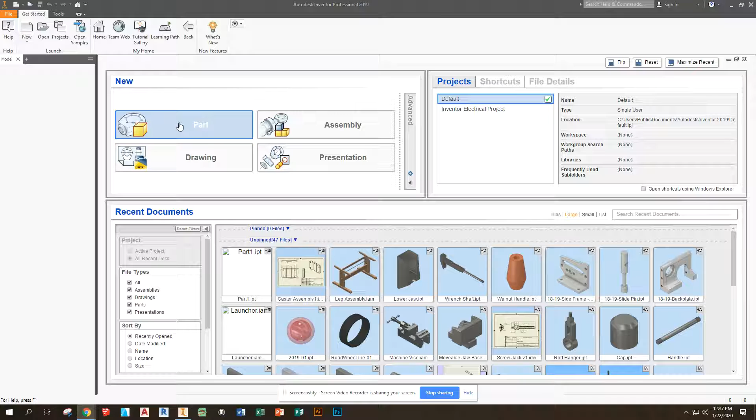So, but as we're doing this, it's really pretty easy. We can actually do the holes in it two different ways, but we're going to do them all about the same. Oh, it looks like we got something disconnected. We'll worry about that in a minute. But let's do the first part right now.

So first part I'm going to start a sketch. I'm just going to go to my XY plane. I'm going to pan down by pushing my mouse wheel down, holding it and dragging it downward until I move that to the lower left-hand corner of my screen. And I'm simply going to start here.

And since there's no dimensions applied to this, I'm just going to draw a line that's, say, 4 inches long this way. Zoom out a little bit, point it straight upward, get it going 90 degrees, type in 2 for the distance. I'm going to bring it over about 3/4 of an inch, down about 1 inch.

I'm actually going to use the dimension tool here in a minute so I can explain it. We're just going to throw in a couple of things real quick. Use the constraints that are showing up, the visual constraints like we are, and get that shape just roughed in. So there's my rough shape of my first part.

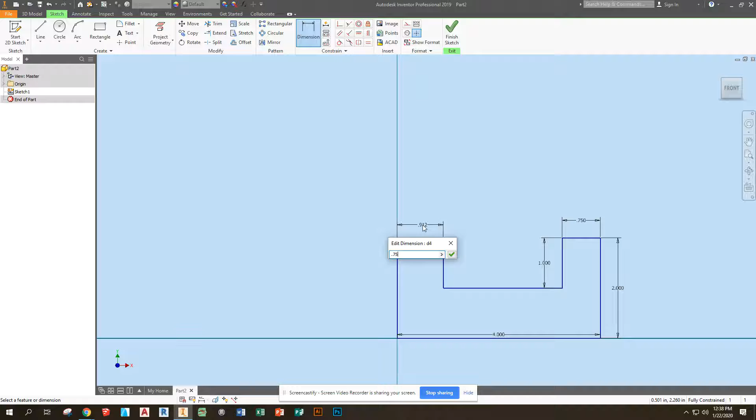Now, I didn't put a couple of dimensions on it. This dimension right here, so I just use the dimension tool, click on the line, drag it up where I want to place it, click again, type in 0.75, and that should right there be constrained to be the same as that because this is parallel and that is parallel. And I think I constrained it visually to that one, but let's find out. It should tell me it's constrained. Yep, it is. It is constrained because of this issue right here, and we're good to go.

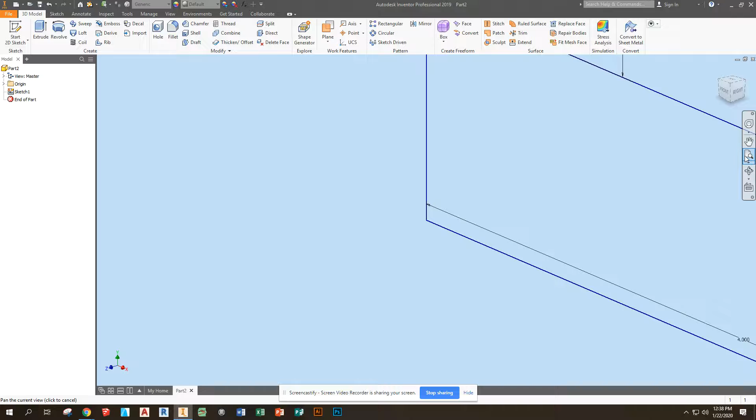There's my first part of my shape. I'm going to tell it to fit on the screen, so zoom all. And we're going to extrude this thing a grand total of 2 inches. So it pops up to default. See my 1 inch in there is highlighted in blue already, so if I just type in 2 and enter, there he is. I'll do zoom all again.

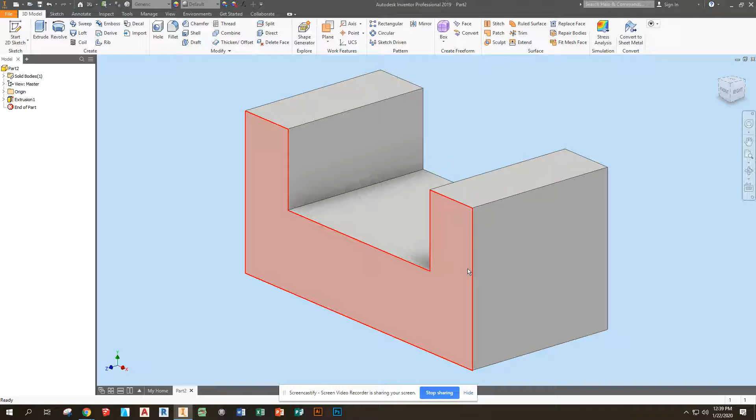Now, I got a couple of different ways I can do this next piece. I can do an extrude cut from here back. I could go to this surface right here and do an extrude cut downward. I could go to the bottom and do extrude cut up. It really doesn't matter, it's all the same thing. I'm going to do it in one go.

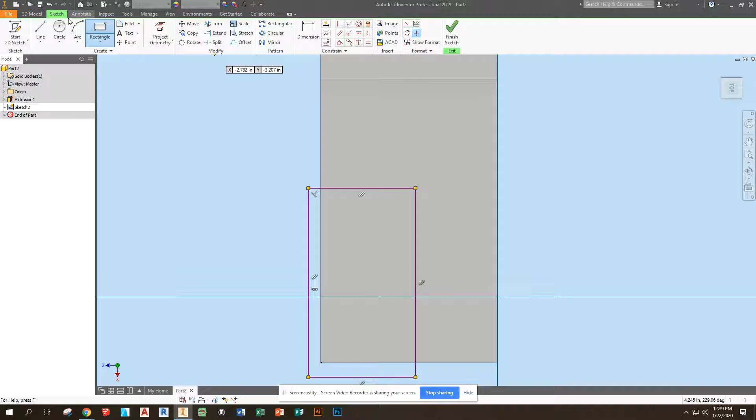So I'm going to click on this surface, 2D sketch, pan it up, and then I'm going to draw a rectangle. I'm not even putting dimensions on this, I'm eyeballing. I want to be about in the middle of this guy right here, so I can actually constrain it like that if I want. And I'm just going to eyeball it to about the middle here. There he is. I'm going to put 2 circles on him, one right here. I'm just going to give it a size because I can of 3/8 of an inch or 0.375.

And then when I hit the finish sketch here, I can now tell this to extrude cut. So I'm going to tell it extrude, and I'm going to tell it to cut, and I'm going to pick the surface. I want to take that one, I want to take that one, and I want to take this one. It's going to cut the whole thing off, and that's my whole part in one go.

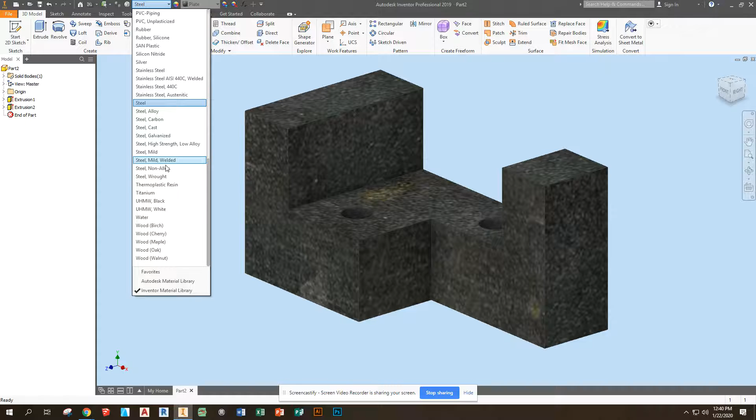If I want to apply material, I can. We'll just do it cast iron. What the heck? That's too dark. Let's go down here and pick one of the steels, just regular steel. That's ugly too. Ugh. There we go. But that's our first part.

So let's do another part. So I go back to my home and I hit part. Yeah, this default. Apparently we got one of the libraries disconnected. Click on this one. I'm going to do the second part. Same kind of situation here. I just click and drag, zoom out a little bit maybe, right roll on my mouse wheel.

Start here. I'm going to go over this way about 4 inches again. 4, actually not about, exactly 4. I'm going to come up, let's go 1/4 of an inch. What the heck?

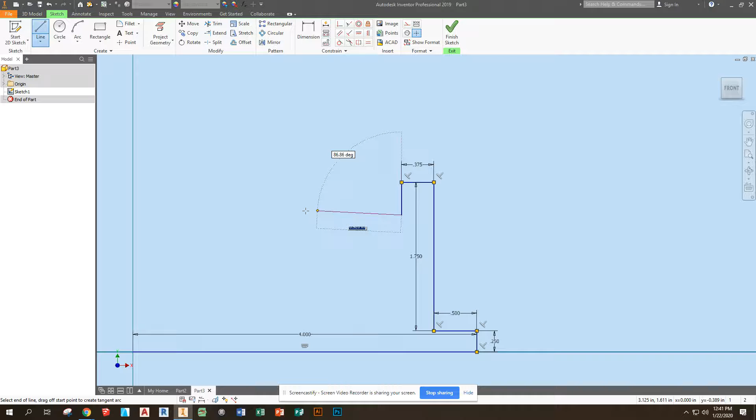Come back in this way, about a half. Up this way. Let's see, I did 1/4, so that'd be 1.75 up. Okay. Come back in this way, about 3/8. Bring it down, take it over this way. I'm just going to eyeball some stuff here for a minute. Bring this back like so, bring it down here till it lines up, bring it back over here till it lines up, and then back to my origin.

Now, one of the things we need to talk about is I can adjust measurements on the fly. Like if I click on that dimension right there I already got, and tell that to be 0.375, it adjusts the whole thing. This, if I want to change that to be, say, like 0.75, I can adjust it. Now, I'll probably leave this one alone. Now, because this right here is now wrong, I can tell this to be 2 inches minus 0.375, and I can actually enter it right like so, which gets that the right size right there.

I can come over to this side, put a dimension here that is a 0.75 here. I can tell this to be a 3/8 as well, 0.375. Okay, so that's all set in there.

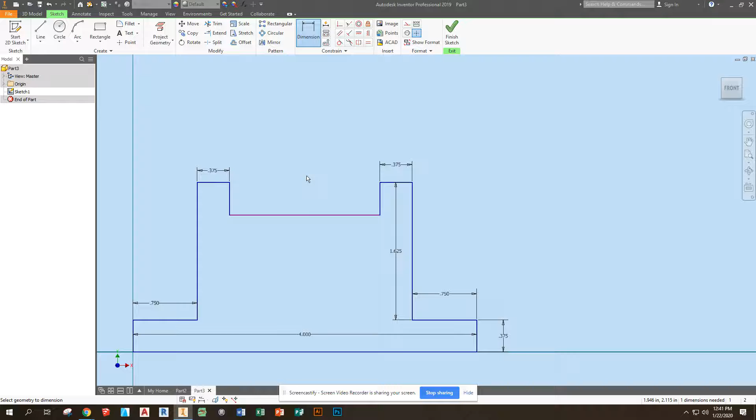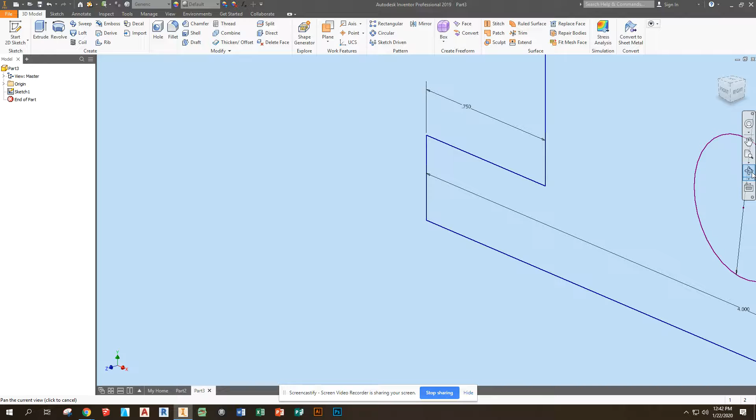This dimension is now a default dimension, and it's being driven, as you can tell. Everything I've got there works. If I want to put the hole in it, there's a hole in the front that sits dead center, so I can constrain it to the center, bring it down, come up like so. Now we'll make it 5/8 of an inch in diameter. I'll finish the sketch, fit it on screen, then extrude this whole shape 2 full inches.

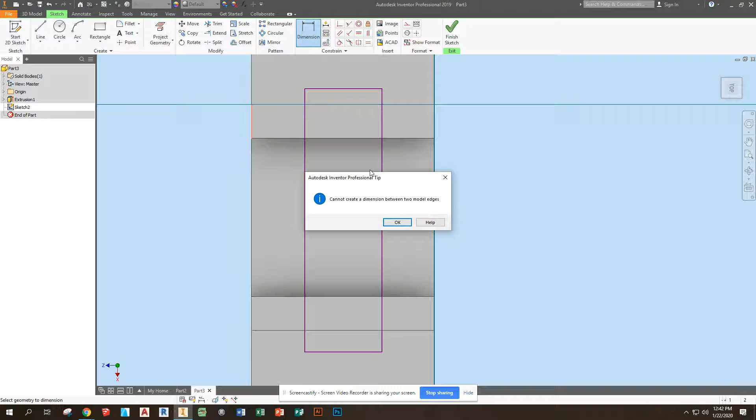The only other thing I've got to do is notch this top down. That's not too difficult. I click right here, start a sketch, pull it up, and throw in a dimension, telling it I want it from this edge to this edge. Oh, I hit the wrong spot, let me try that again. From this edge to this edge, there we go, 0.375. Same thing on this side.

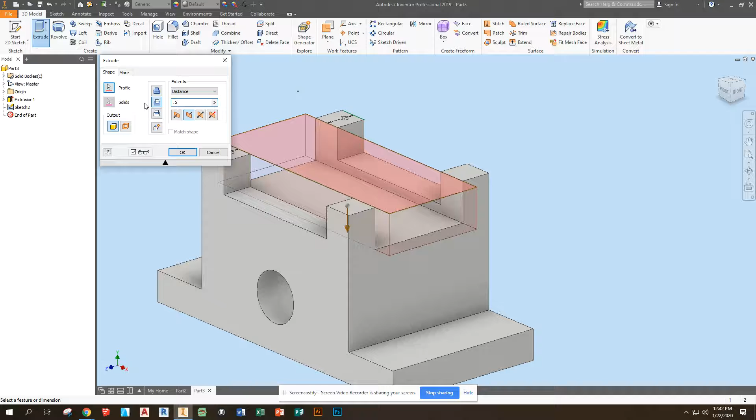When I hit finish sketch, I can tell it to do an extrude and a cut. This time I'm going to tell it to go down about a 1/2 inch. There, okay, so that's my second part done. That's really all there is to it.

So again, we can apply a material to this. Last time I picked some weird stuff, let's pick something odd, there's some non-alloy steel. Didn't change it much, did it? Let's do the high strength. There, at least we got some polish on it.

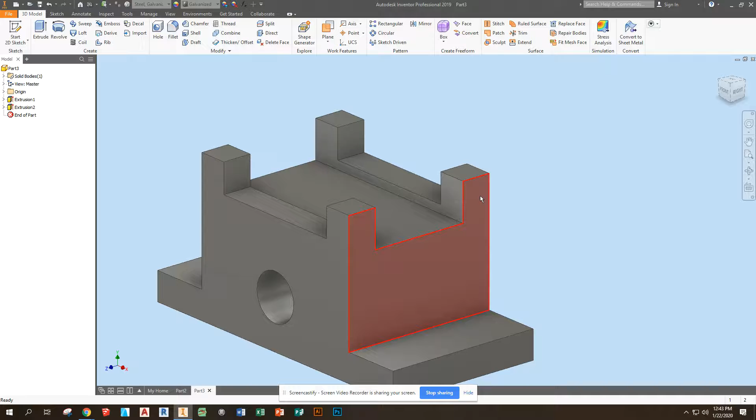Ooh, that's ugly, but anyway, we'll just go with what's there and go to our next part. I would go through all of my parts like this and extrude them up. I'm going to use this next part just to show a couple things in it, that's a fillet, so I'm going to go in here.

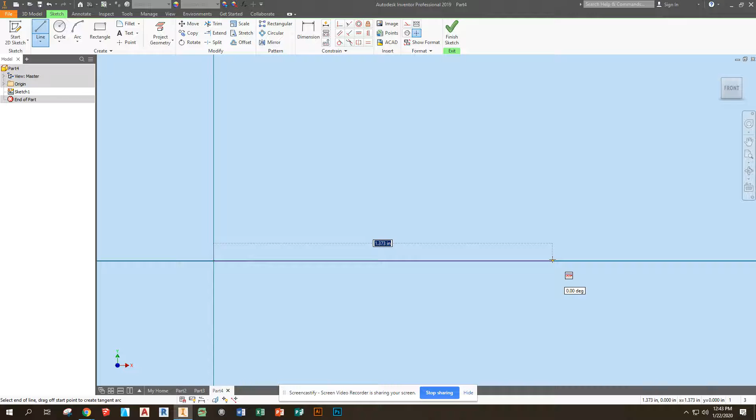I'm going to start the same sketch as before, starting with a line that goes from right here straight out this way, going out the normal 4 inches that I've been going. Then I'll go up this way 2 inches, bring it back this way straight on the 4, and back to my origin point right there.

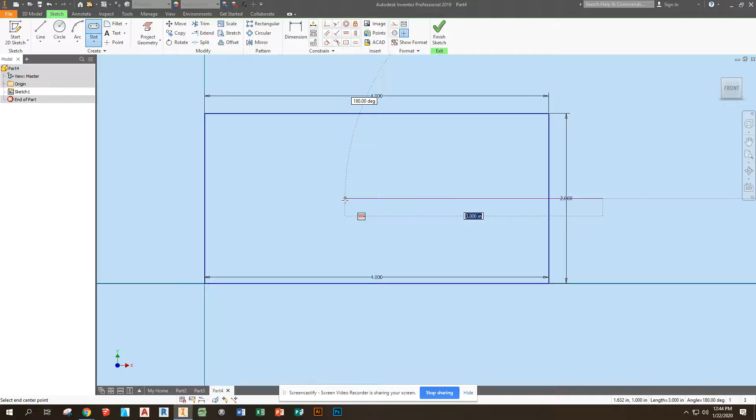Now I'm going to use a couple of different tools real quick. One is the slot tool. If I go under rectangle here, I can use the slot tool, which allows me to do something like this. I click here, click over here where I want the slot to end, and then just stretch it out like so. Okay, there's my slot tool used.

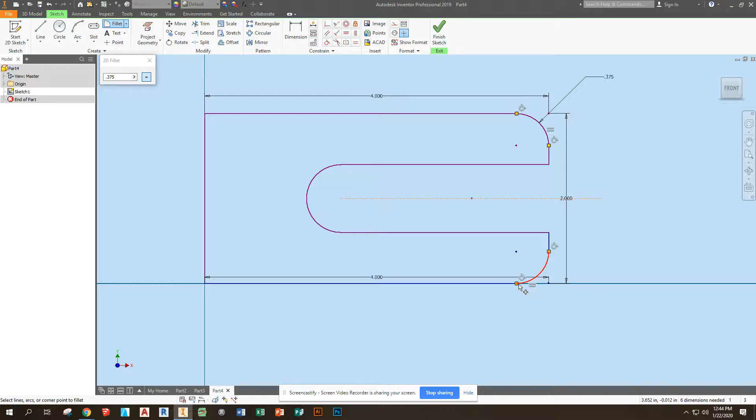At this point I can use my trim function to remove this piece and trim this back so it looks like the object on my drawing. If I want to, I can use the fillet here and set that fillet to, let's back it up, 0.375, and pick this line, then do the same thing between this line and this line. Once I've got that, I can hit finish sketch.

I'm going to tell this to fit on screen, and then when I extrude this, actually let's narrow that, we're only going to go up on this one about 3/4, that, probably half. That looks about right to proportions.

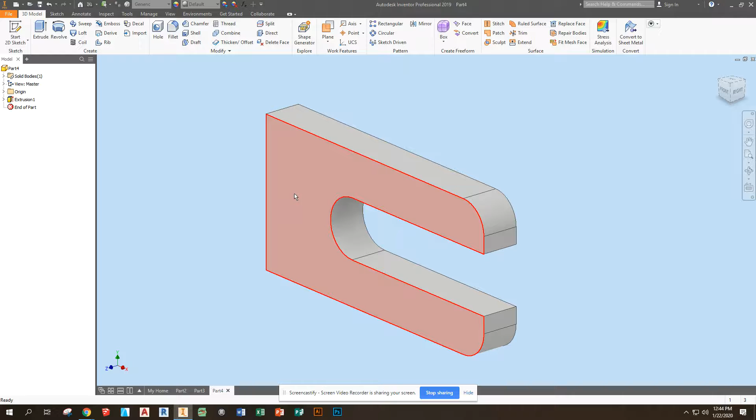Then I can go back on this surface and start a sketch, drawing a rectangle this time instead of a slot. It goes from this corner right here, I can snap to it, down to this corner right here, snap to it like so. Oops, I went off, oh well, I'll just put a dimension on it. Finish sketch, extrude, we'll bring that up, let's go about 1/4 inch.

Do the next one up here. Sketch, extrude, cut, 0.125. That's roughly it. Now, if I look at my sketch over here, it doesn't quite match up the way I want it to.

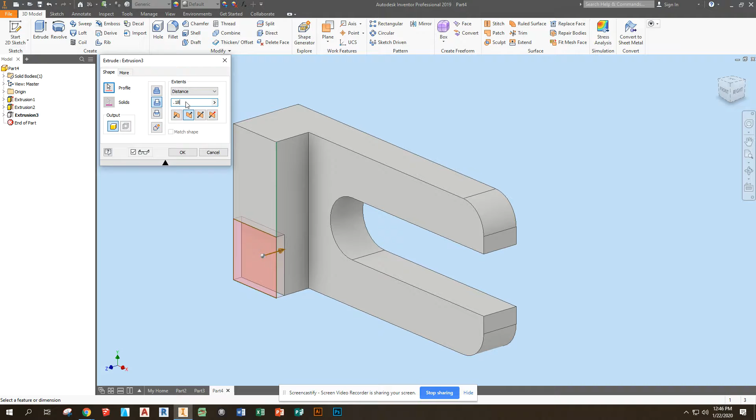This line should be in the middle, this should actually be slightly taller, this should still be about that same height there. So to edit this, I can go back to my extrusion here, right click on it, edit the feature, and tell that extrusion to come up another 1/2 inch, which means I can come back to this extrusion, edit this feature, and tell it to go 0.1875, or better yet, 275, and end up with what I want right there.

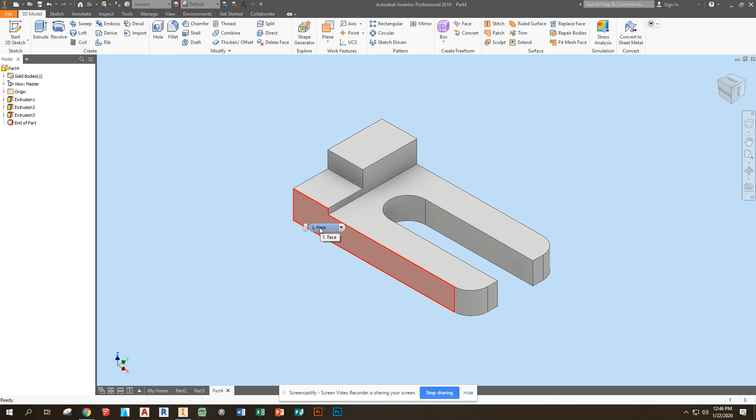Now, if I wanted to, I could have left these square and used the fillet tool to make them round, but this does the same thing. This in our drawing should actually be oriented this way to us, so it really doesn't matter on my default here, but I'm going to leave it right there. That's it. There's 3 of the 12 parts we're going to have you model, and I'll do the others as we get time. Bye.